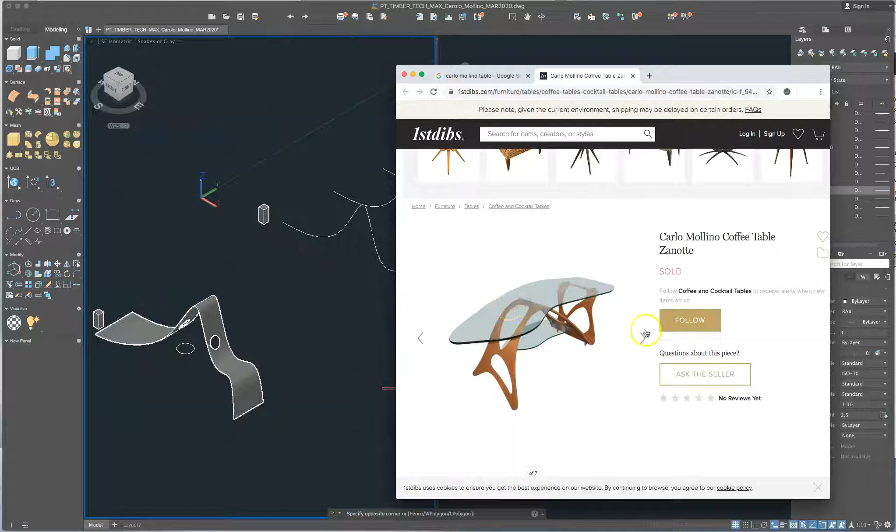Okay, we're going to do some 3D modeling and just to show how we could possibly make a Carlo Mollino table. So just to give you an idea what a Carlo Mollino table looks like, here's one. It's a continuous piece of plywood that's molded and then it's got these cutouts in it. Kind of cool looking. You've got the table. Very nice. Quite cool. Okay.

So if we think about it, that piece of plywood is like a spline curve. So we're going to make a spline curve and then we're going to give that spline curve the thickness by offsetting it, and then we're going to close the ends, so we're going to have this continuous spline curve. Then we're going to extrude that spline curve out and cut holes in it. So that's going to be the approach.

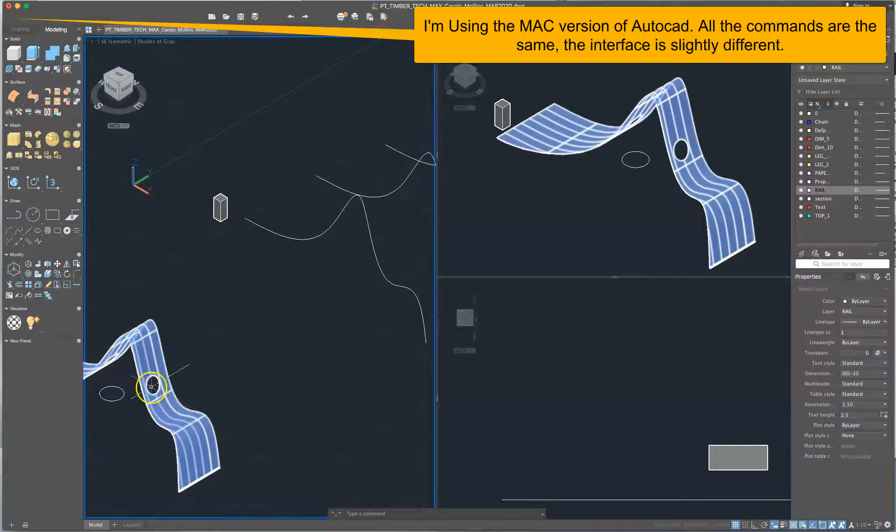Okay, so the first thing I did was, now normally I would draw everything on the UCS, but just because I want this spline curve always to appear vertical, I'm actually just going to draw it vertically. So to do that, I'm going to draw my box. Zoom in, and then I'll go UCS and select this corner of my box, select my x-axis, and then select my y-axis, and now I'm drawing on my box. And then I can do SPL and go, right, and that's my spline curve.

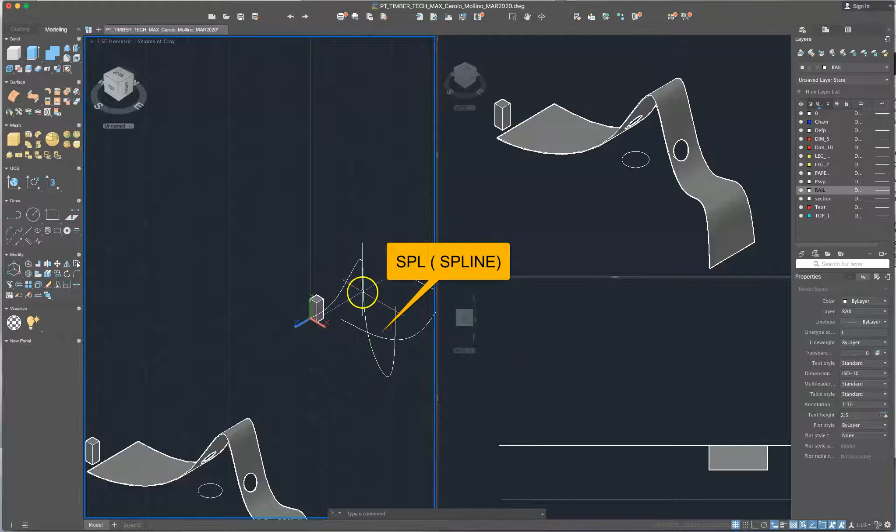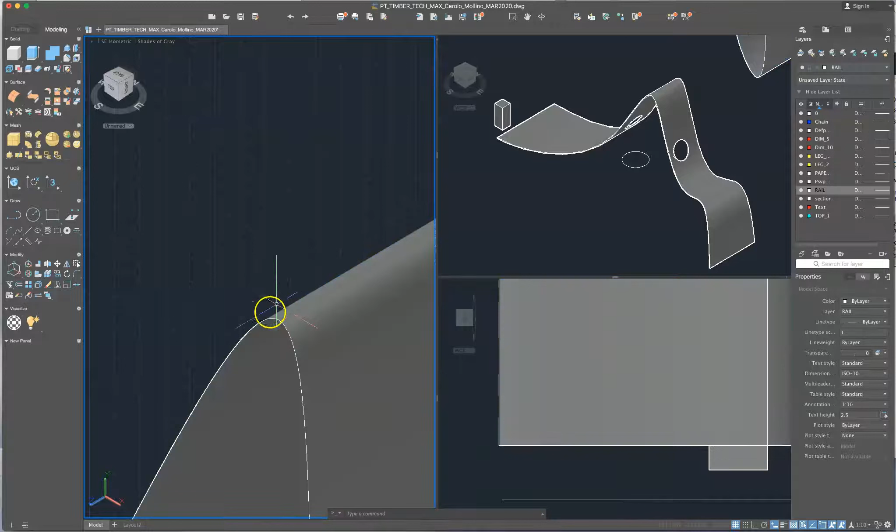Now, if I extrude this at this point, I'm just going to get a surface. So extrude. I'm just going to get a surface, and this has no thickness whatsoever. Okay, so generally that's much harder to model because I have to offset this surface and then put an edge on the end of it. And it's usually very difficult to do that. So what I'm going to do instead is

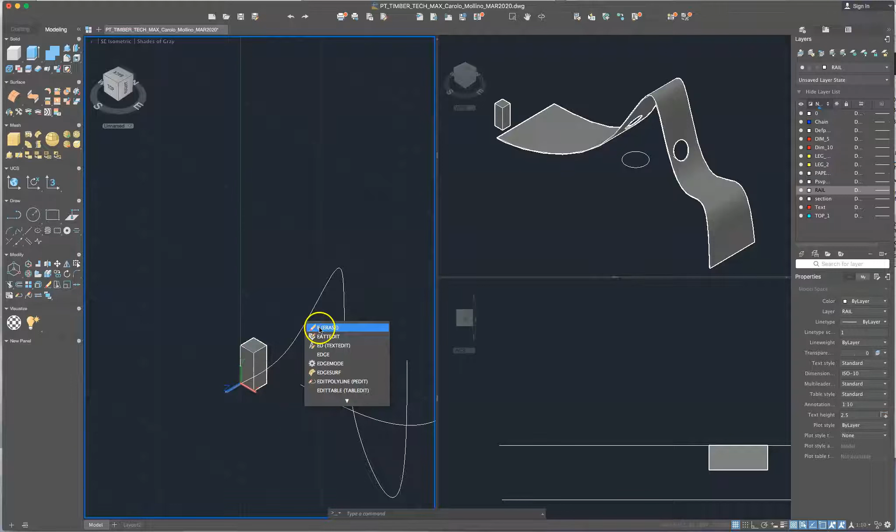I'm in this UCS. I'm just going to delete this line here. Okay, so I'm in this plane, and so I'm going to offset this object. Offset. Going to offset it 10. Okay, so that's offset 10. Now, big problem here then is that these aren't joined at the end, so I do PL for polyline, and then I make sure that I'm using my endpoint to connect that. Then I do the same for the other side.

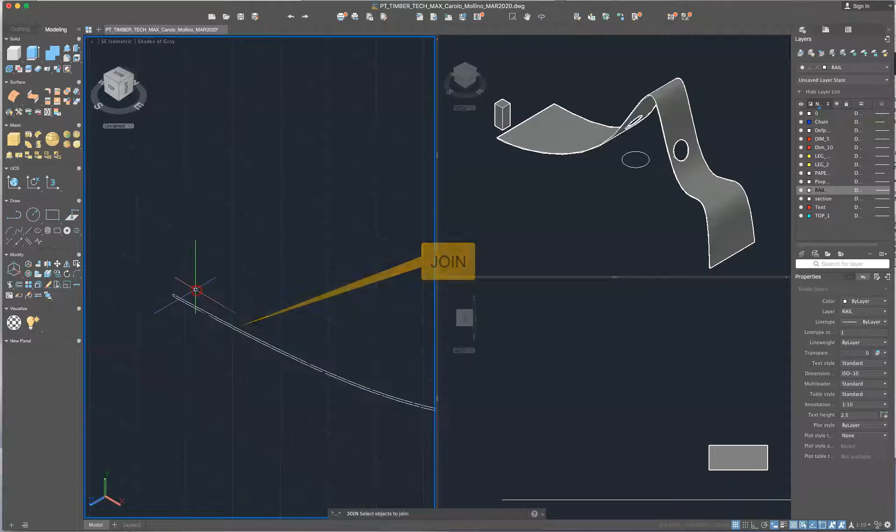Right. Now, at the moment, I've got 4 polylines. I have this one, I have this one here, this one here. And to do a proper extrusion, I need those to be closed. So I'm going to join, and then I'm just going to select that, and then just pan across here, and I'm going to select that little bit at the end. Right, and now I'm going to make sure that everything is connected. You can see that's connected, and really make sure that it's connected at either ends.

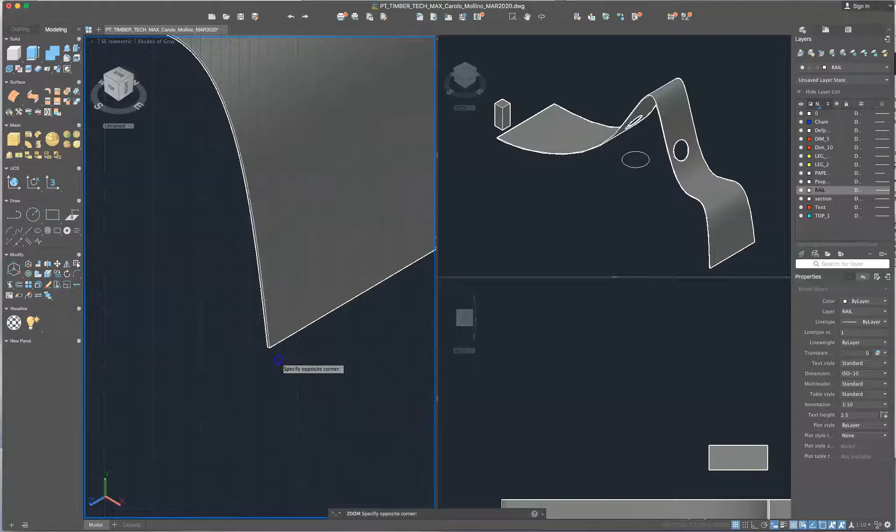Right, now I'm going to extrude. Okay, now I can see that this has a thickness. That's nicely done. It has a thickness either side. Okay, so now the next thing is that we have to make it that we can cut into these shapes. So I'll just make sure I'm going back to UCS World,

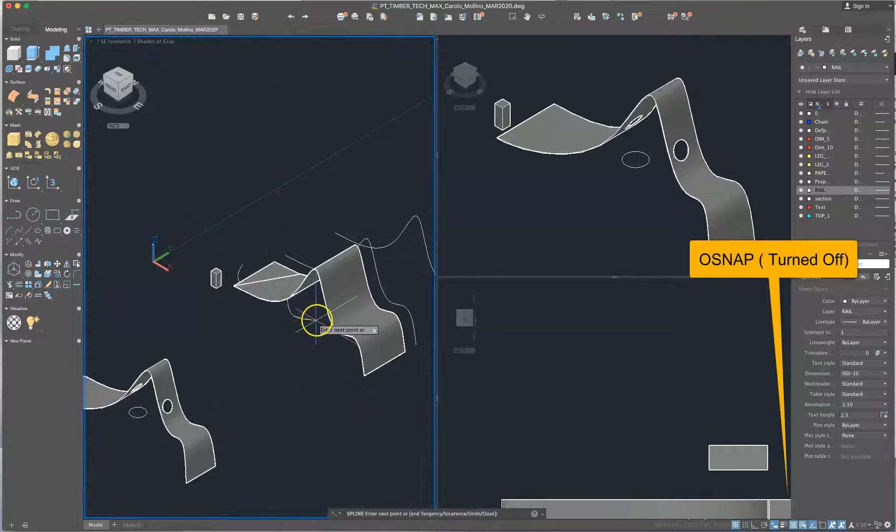and I'm going to do another spline, SPL for spline, and it's going to draw a spline curve here. I'm going to turn my OSNAP off because I don't want to be clicking on any points that might be in this shape here. I can extrude it, so I'm going to extrude it. Now, just remember that when I'm extruding this, I'm actually just extruding a surface.

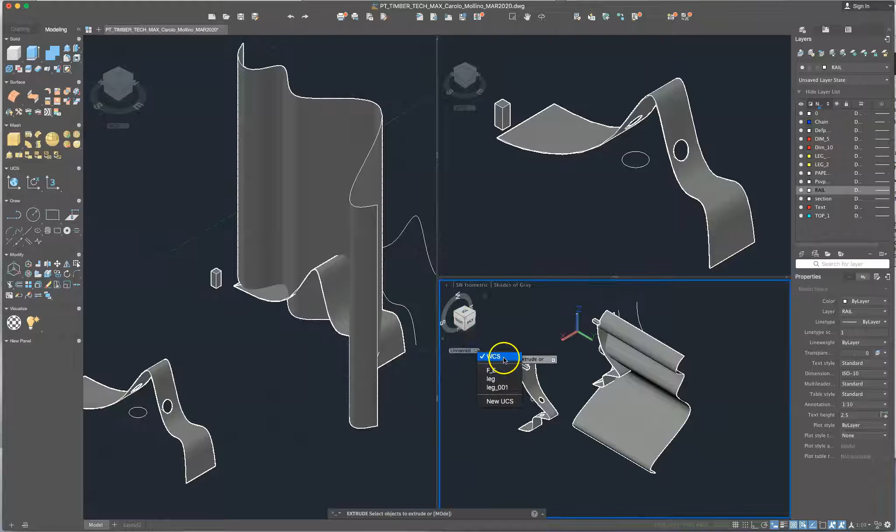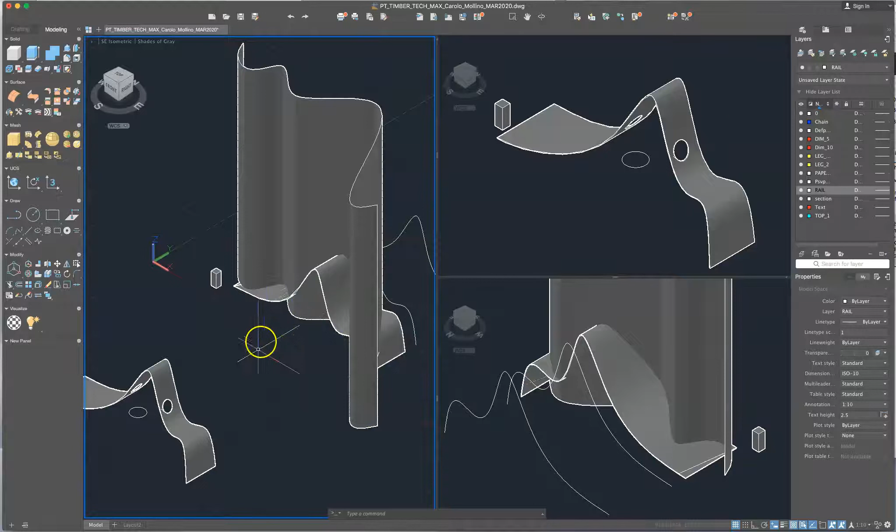And if we look at this here now, we'll just go into a world coordinate system here, top. We look from one side. And we can see here that it doesn't intersect the whole thing. And that's just because of the way I drew this spline. Part of it dips below the world coordinate Z. So I'm going to move this surface down in my Z plane. Continue.

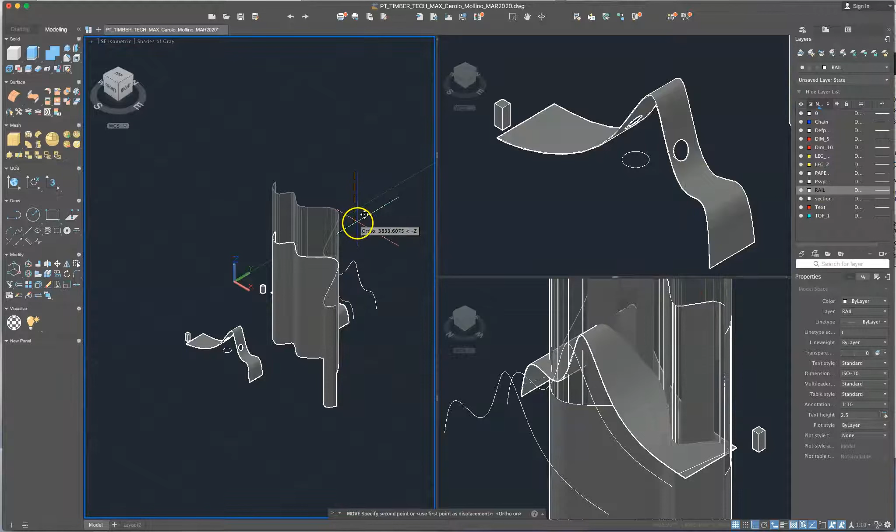And I can see that I'm moving it in the Z plane because of the minus Z there. I'm just going to move that down. Yeah, I could have probably drawn this a bit neater, but okay. We can see where these two intersect.

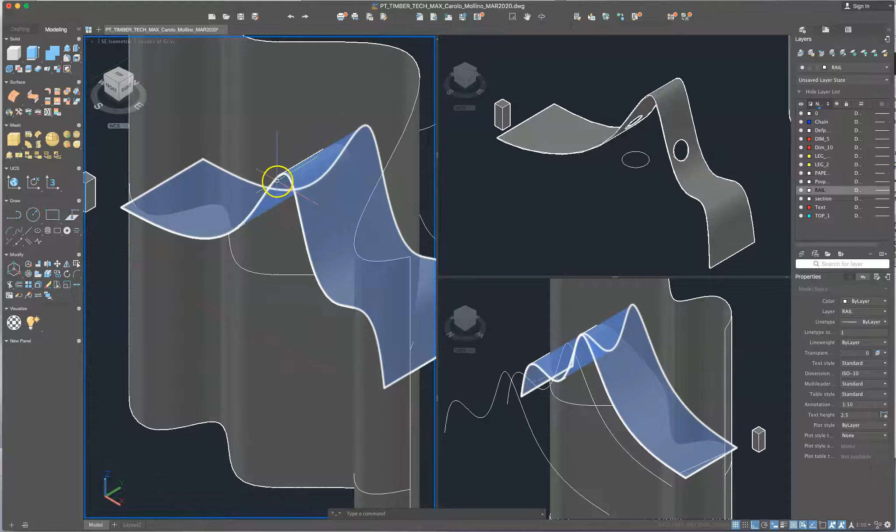So now the next thing is that I'm going to take this surface and use it to split this extrusion. Now this is a solid object and this is just a surface. Okay, so this is the command here. It's press pull, slice. Okay, slice here. So now with slice, it's important I select my solid object.

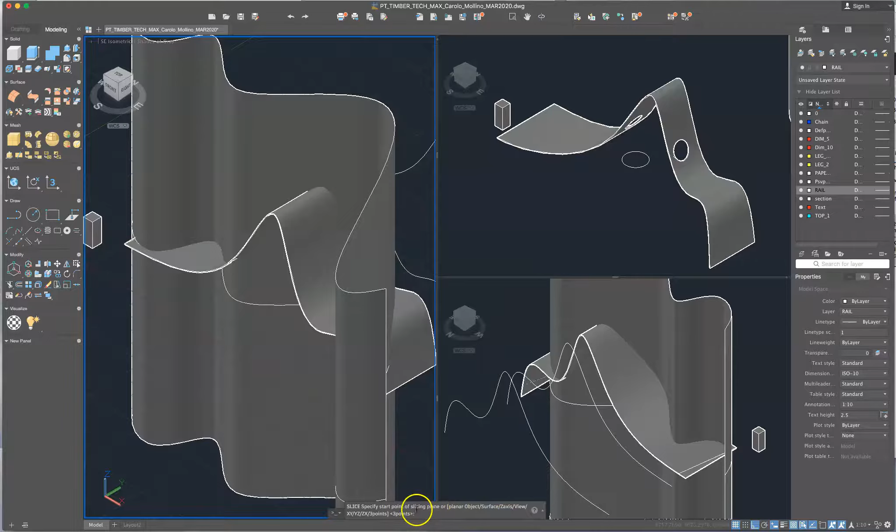I'll right click once I've selected it, and then I can start my slicing point. You know, I could draw a line and another line, draw a point and another point, and then it would raise a plane from those. Or I can select surface. So I'm going to go S for surface, and I'm going to select this as a surface.

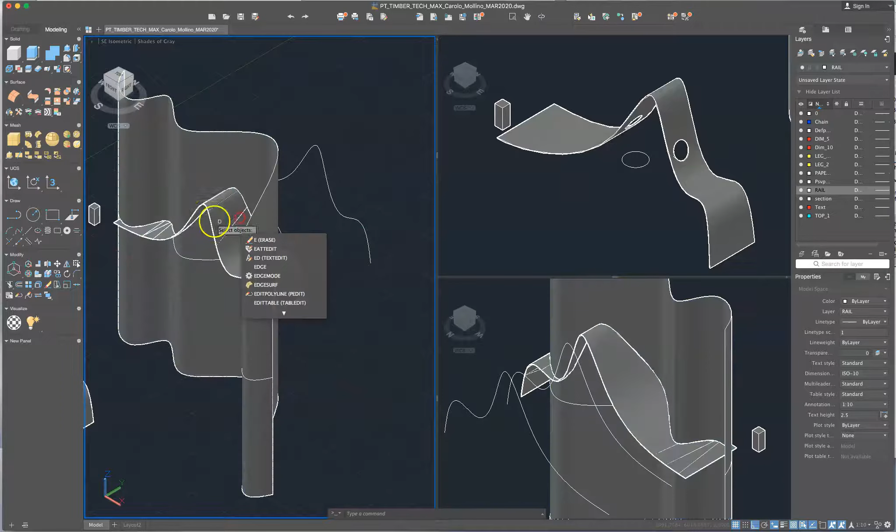Now, it offers you the opportunity to select one part or another. I generally just keep both, and then when that's done, I just delete the part I don't want. So I select that, delete. Now I'm going to select this so I can just see that original part, and that's what I'm left with. Okay, so that's pretty cool already. I'm pretty happy with that now.

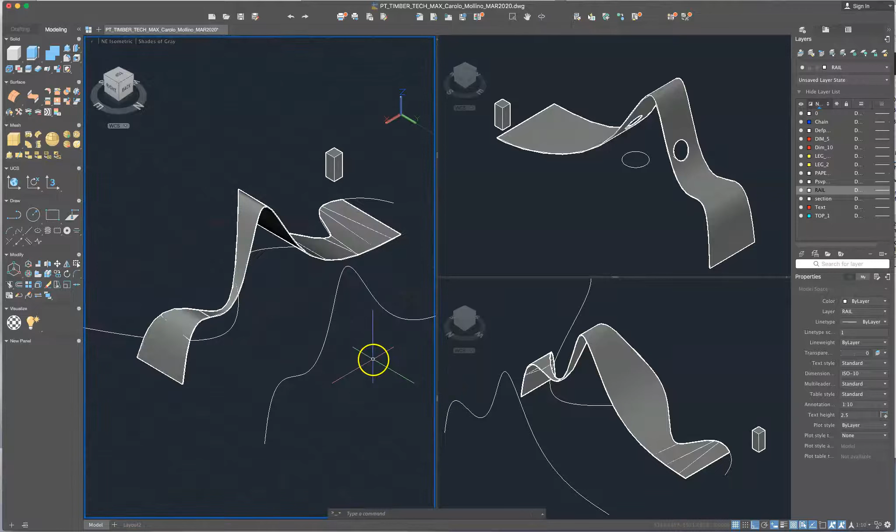Now, I've managed to delete a little bit too much here. So maybe I'll just go in here, zoom in, and we're just going to presspull this extrusion edge outwards. Now, I extruded that out. I found it easier when I put my UCS just on the corner there. And so I've just made this a bit wider so we can punch a hole through it, okay?

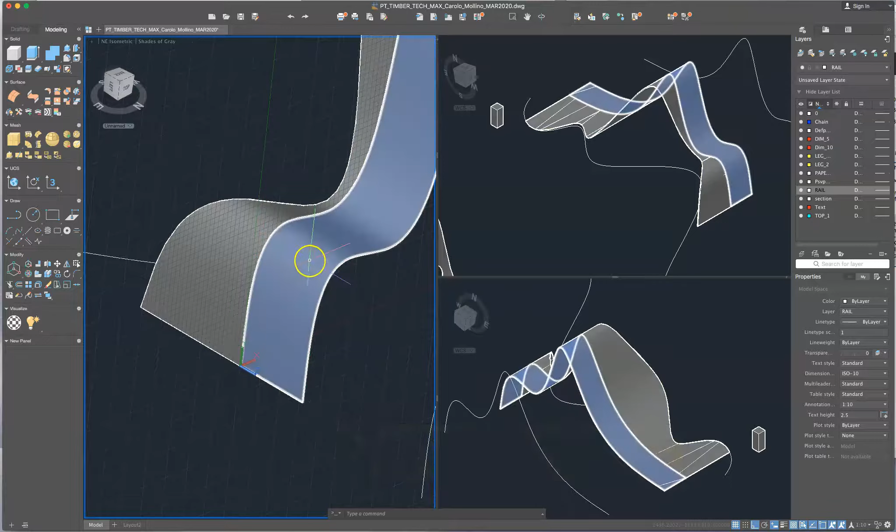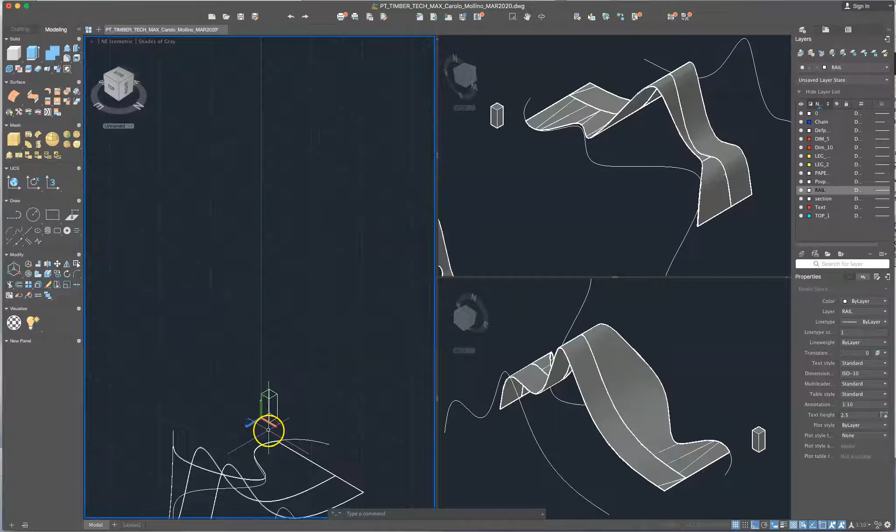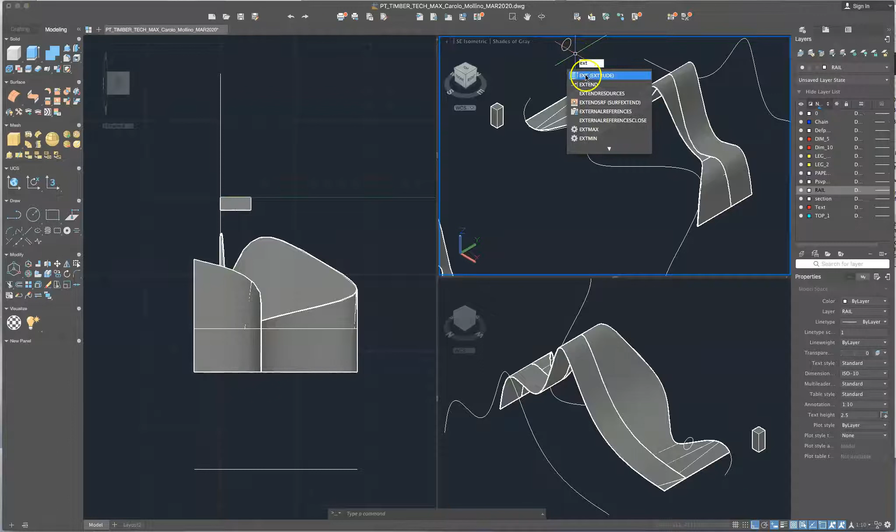So now what I'm going to do is I'm just going to go back and use my little box here to change my UCS. So UCS, this corner, and this corner. And now we're going to just look at that end view, right? And we're going to draw a circle. Okay, so circle. So we've got our circle up there and we're going to extrude that out. Extrude, okay. Select that and then drag it out.

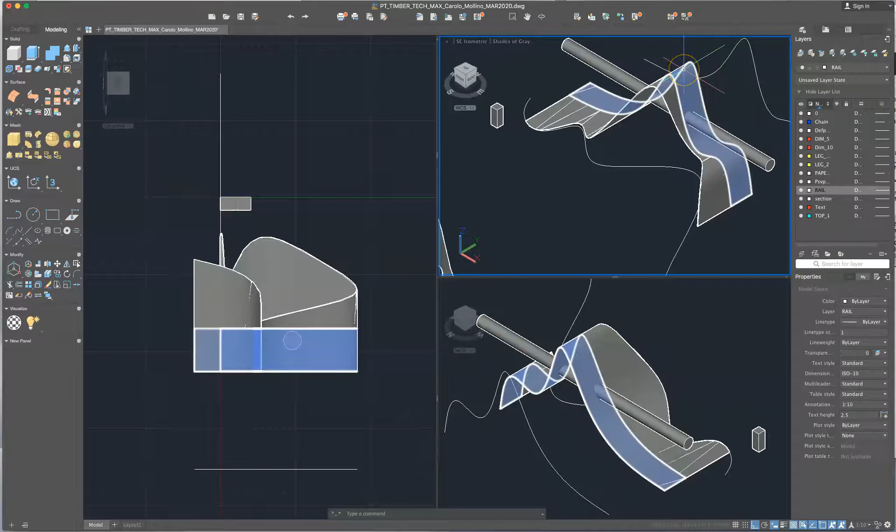And now we can see where we've got this wave-like shape and our tube here. And obviously, you could create a polyline that was an unusual shape, extrude that out, and I'm just picking a circle because it's easier. And because we've made this as a solid, it means that we can take this and subtract this tube from this. So that's what we're going to do.

Subtract. So we select our object that we want to subtract it from, select, we right click, and then we select this object here, and done. Okay, and we've got a hole going through.

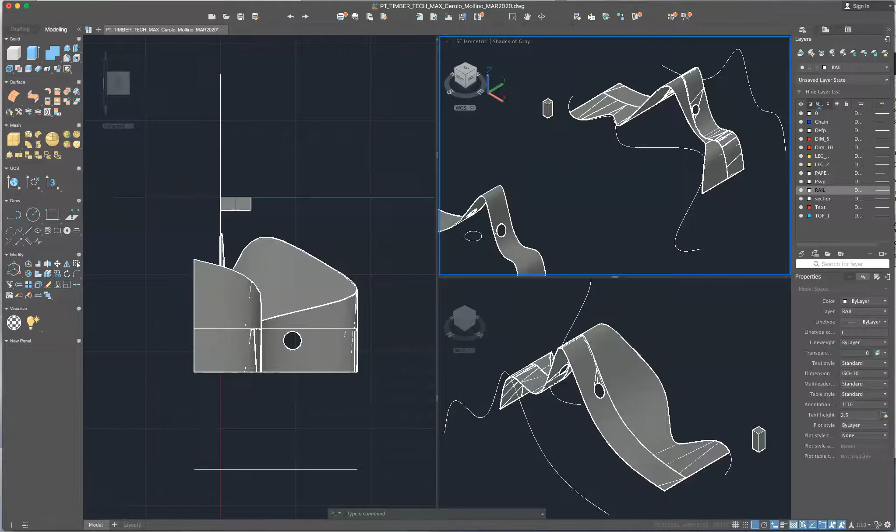Okay, if we wanted the hole to go through this object at an angle, what we would do is we would change our UCS so that when we made our extrusion, it would come at an angle. Okay, so we can show how to do that here. So what I've done here is I've aligned my UCS so it's on this box, and then I can use rotate to rotate that circle. I'm just going to rotate it from the center point, and just turn OSNAP off and ortho off. Okay, so that's been rotated.

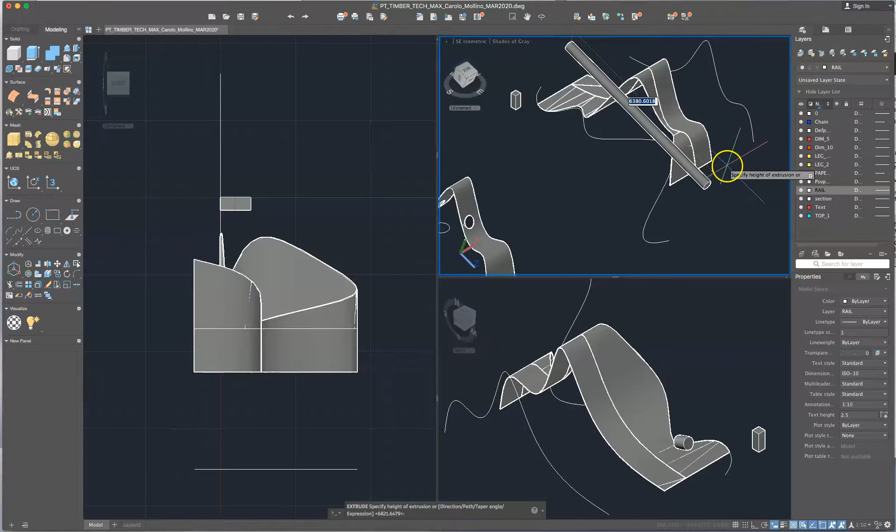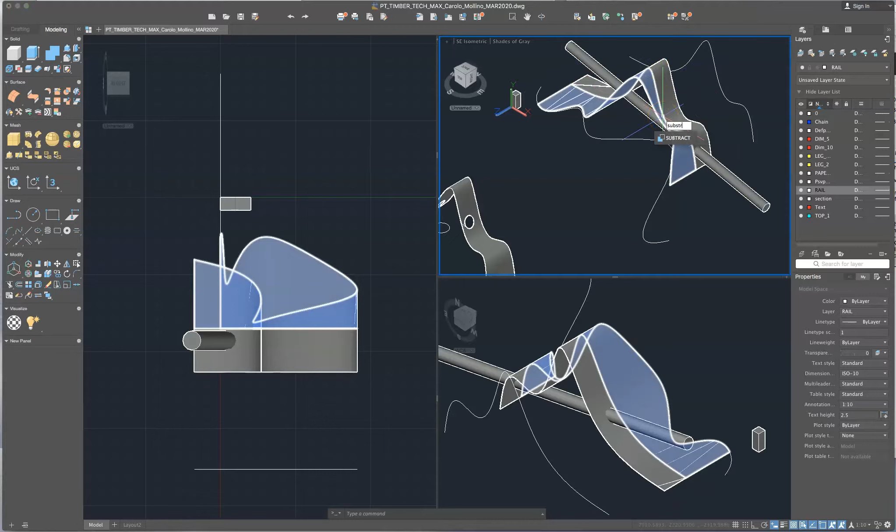Okay, and now extrude again. Extrude. Select this and drag it through. Okay, and now once again, maybe we'll try to rotate that again, just so it's passing through more of the object. There we go. And now we can subtract. Select this object, right click, and select this object, and voila, cut through.